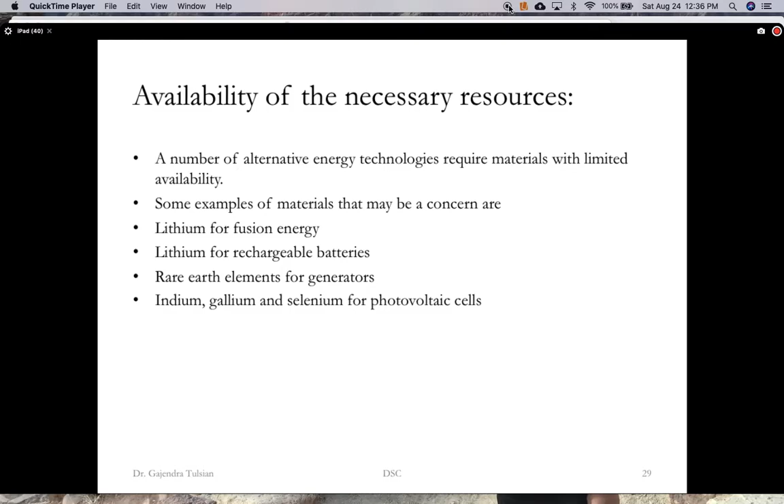As you try and make the whole world run on renewable sources, you need some rare earth elements for generators and stuff like that, and you need these elements for making semiconductors for solar cells. So are there enough resources in the world to produce all the necessary technologies?

and you were making photovoltaic cells using indium, gallium, and selenium as ingredients that go into the cells - but this is just an extrapolation of the problem, we won't be running the whole world on solar cells. There are other technologies besides these to make solar cells, but anyway, just giving you an idea of the scale of the problem.

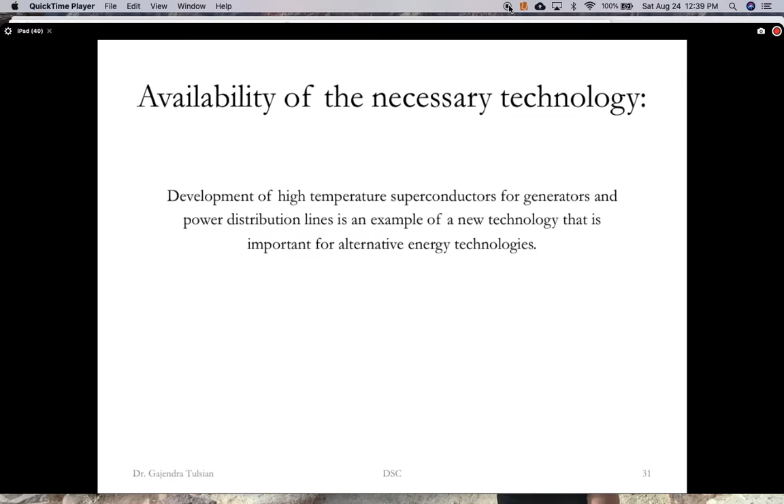But right now, superconductors are expensive in the sense that existing superconductors have to be maintained quite cold. But if we can come up with high temperature superconductors cheap enough, then that would aid in our transition.

So here's a high temperature superconductor showing you the structure of one particular high temperature superconductor. In this business, the holy grail - what you really want when we say high temperature - is room temperature superconductors, so we don't have to spend any money on cooling.

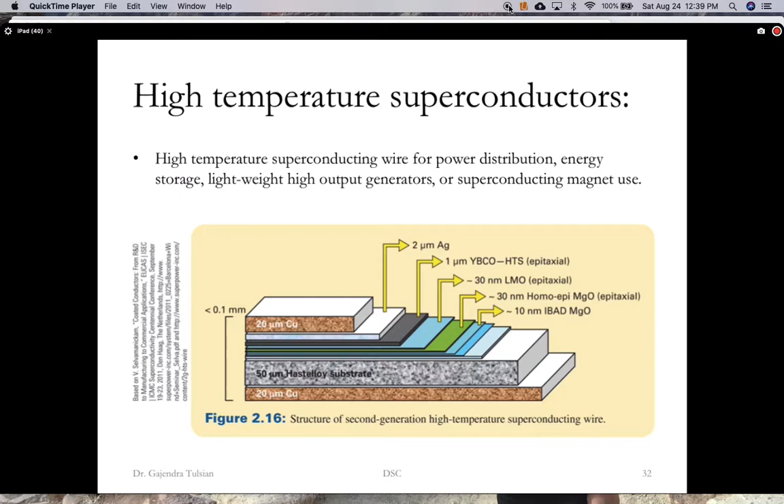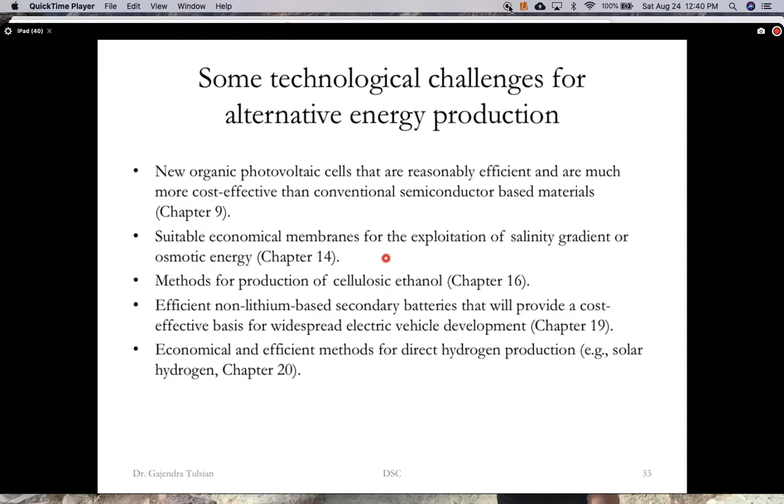So here are some of the technology issues that one can face for renewable energy production. These are some of the points - I'll let you guys read them.

Now, of course, the main factor really, it all boils down to economics. Ultimately, technologies must be competitive in order to be attractive for consumers to adopt them.

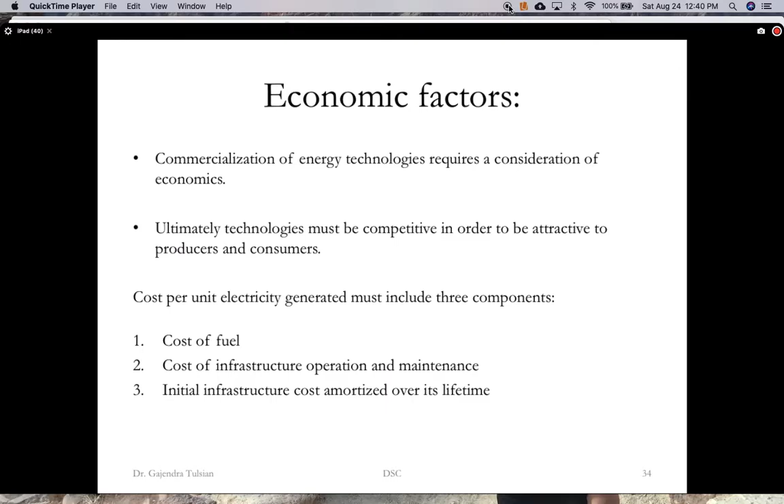Some of the issues you will face as the world transitions towards renewable sources: there's the cost of fuel, cost of infrastructure, operation and maintenance, and so on? So those are the two main costs - fuel and operating costs is what we'll look at.

So for instance, for a solar plant, the fuel cost is zero. The operating costs are also minimal. It really is just capital cost. Once you put out the money to build a solar power plant, you just harness energy for the next 20-25 years. So the three costs will be fuel, operating costs, and infrastructure costs to build the thing.

Because, for example, fuel cost is important for coal. If you have a coal power plant, you have to keep buying coal and keep dumping CO2.

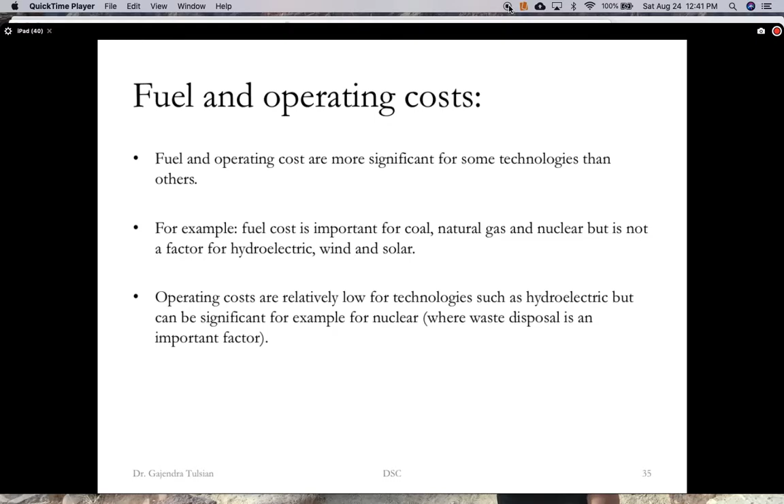So fuel is not a factor for hydroelectric, wind, and solar energy. For all renewable energies, fuel costs are zero, and operating costs are relatively low as well. So fuel and operating costs are minimal for these renewable sources. That's another great thing about them, besides the fact that they have zero carbon footprint, essentially.

So here are infrastructure costs. We'll look at infrastructure cost, which is the cost to build this plant. So for instance, if you wanted to build a coal power plant, this is dollars per kilowatt capacity.

These are ballpark numbers. Going back to my Hoover Dam example, a Hoover Dam is a gigawatt plant, and that's a million times kilowatts. If you're going to build a coal power plant, a 1 gigawatt coal power plant, that would be a million times that. So it would cost you $500 million, roughly half a billion dollars.

To have windmills worth 1 gigawatt produce 1 gigawatt, you have to put out $800 million, roughly a billion. But remember, this is great because once you put out the money, operation costs are zero, fuel costs are zero. For coal, when it's running, you're paying for fuel, and on top of that you have a large carbon footprint. Natural gas also has fuel costs that are ever present.

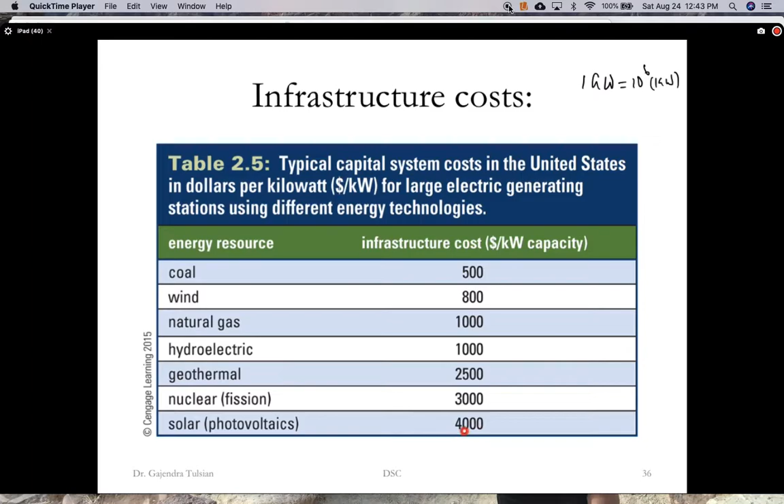So for a 1 gigawatt plant, today you could build a Hoover Dam, well it also depends on location, for $1 billion. Geothermal energy is $2.5 billion. A nuclear plant would be $3 billion, actually more. And this table says it would be $4 billion for a solar power plant. But these costs are coming down quite fast, so let me show you some newer numbers.

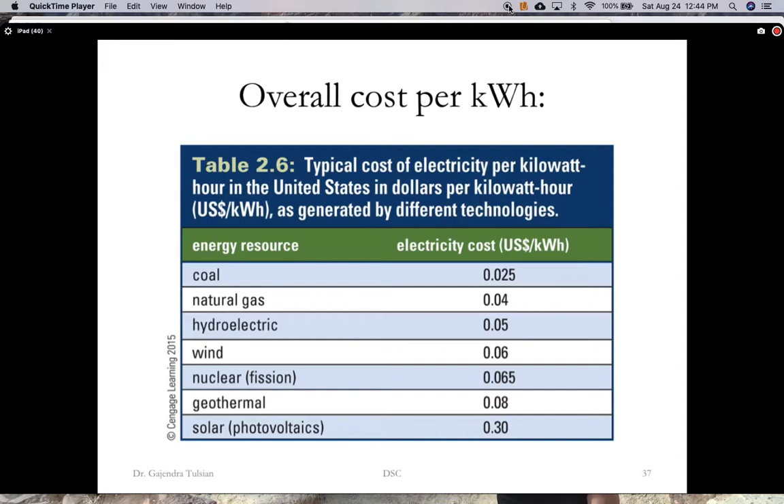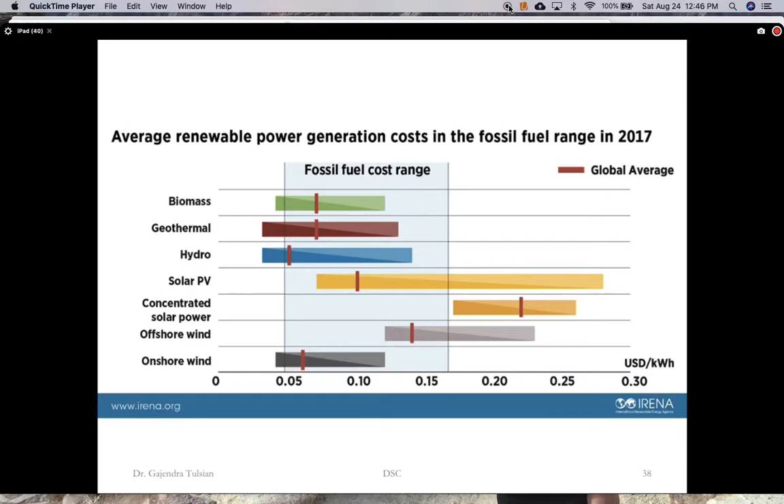So what's the cost of electricity in some countries? In the US you pay 10 cents a kilowatt hour on your electric bill. If you lived in China, you'd be paying 8 cents. In India, 10 cents - it's roughly 10 cents in most places. Some countries tax much more - in Brazil you'd be paying 35 cents per unit of electricity, also in Germany.

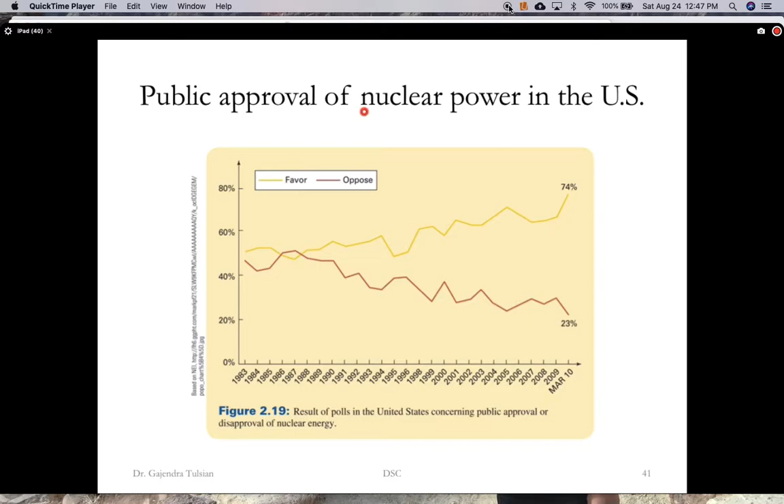Now we'll consider some public opinion on various technologies. Nuclear energy is quite divisive - people have strong feelings about it. This is the public opinion approval of nuclear power in the US. Currently we have about 100 operating nuclear stations, and we haven't added any nuclear power plants in a while. The percentage that oppose nuclear power has been steadily dropping since the 80s, and those that approve have correspondingly increased.

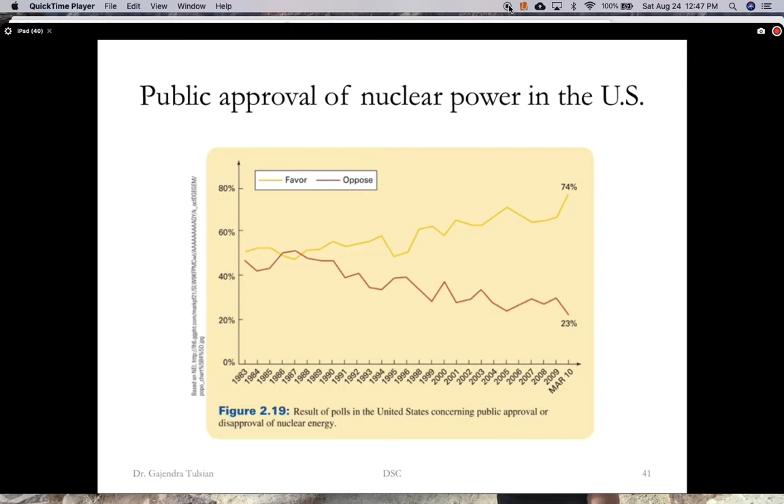Now let's look at what happened in Japan. Because of a tsunami in March 2011, a few nuclear power plants close to the beach got damaged, and the disaster occurred on March 11th. Japan used to get a sizable portion of its energy from nuclear power plants. On April 18th, 50% still supported nuclear power. By May 16th, 40% - as people saw the damage that occurred, their support waned, but it didn't go away. Nuclear energy - one can build smaller plants, safer newer designs. And the great thing about nuclear power is it's got zero operational carbon footprint.

So what is it that people care about? Price is the top concern, and then you want continuous supply and protecting the environment. People are responsible, and protecting the environment is one of the top three concerns that people have. Of course, you can't pay an arm and a leg for energy, so cost is an issue as well.

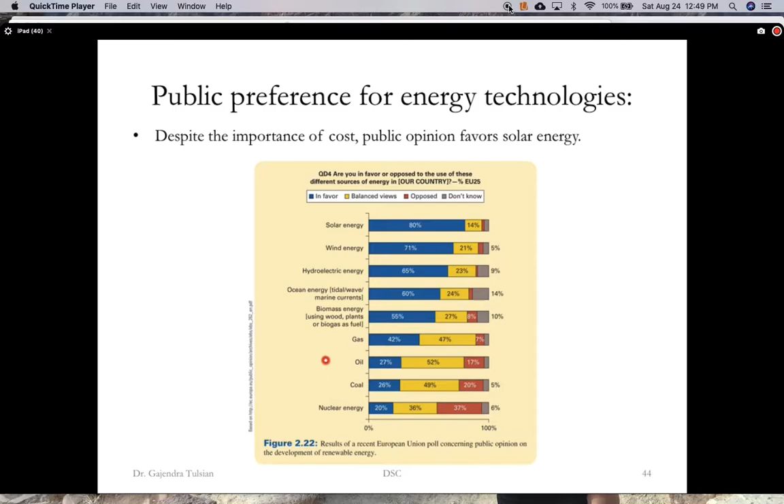Public preference for energy technologies - look at this. Solar, most people - this is a European Union poll - most people prefer solar energy, wind, hydroelectric, all renewable sources. Ocean energy, but that of course won't solve world problems, that's a niche solution. Biomass is also niche. All the fossil fuels are at the bottom. Unfortunately, nuclear is also at the bottom, but nuclear should be up there - so this is a marketing issue.

So we want to look at the environmental impact of some of the technologies. We'll look at that in a second.